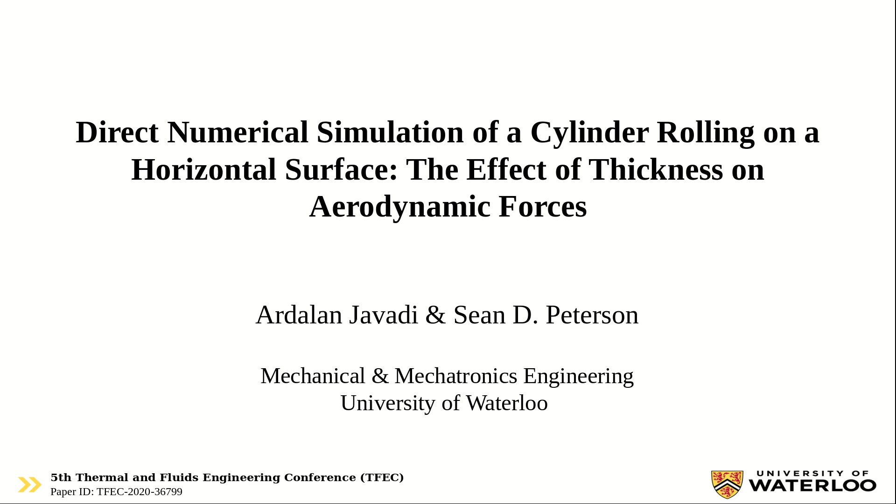Hello everybody, the presentation is about direct numerical simulation of a finite cylinder rolling on a horizontal surface, very similar to a rolling wheel on a horizontal ground. And the effect of thickness is addressed.

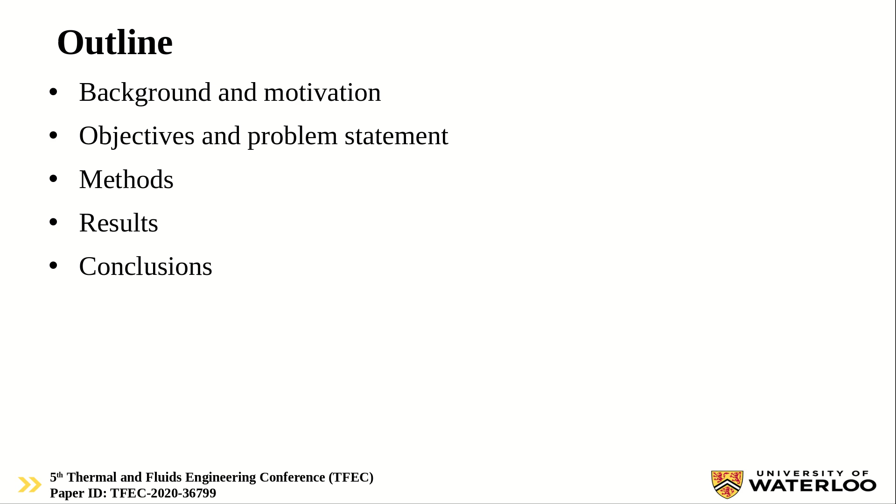We go through the background and motivation of this work, objectives, numerical method, results, and then conclusion, which is the effect of thickness on aerodynamic forces exerted on the wheels.

The background: in fact, such research is mainly funded by the automotive industry. So there is lots of research which studies aerodynamic forces on a rolling tire coming from automotive engineering, with a wheelhouse in a car or without it. So they consider forces and unsteady fluid structures.

But there is some research which considers bicycle tires in different conditions, like spoked bicycle tires, where in 2012 a job was done numerically and reported negative lift force. There are others, like cladded tires, or different configurations of bicycle tires numerically and experimentally studied, which are available in the literature.

But Pirozzoli in 2012 did a job very similar to what we've done here, DNS of a rolling cylinder, and they considered the effect of Reynolds number at values less than 1000, and they reported that the drag, as expected, decreases as Reynolds number increases, and they reported positive lift, as long as they considered just one geometry, and the aspect ratio is very similar to a Formula 1 tire.

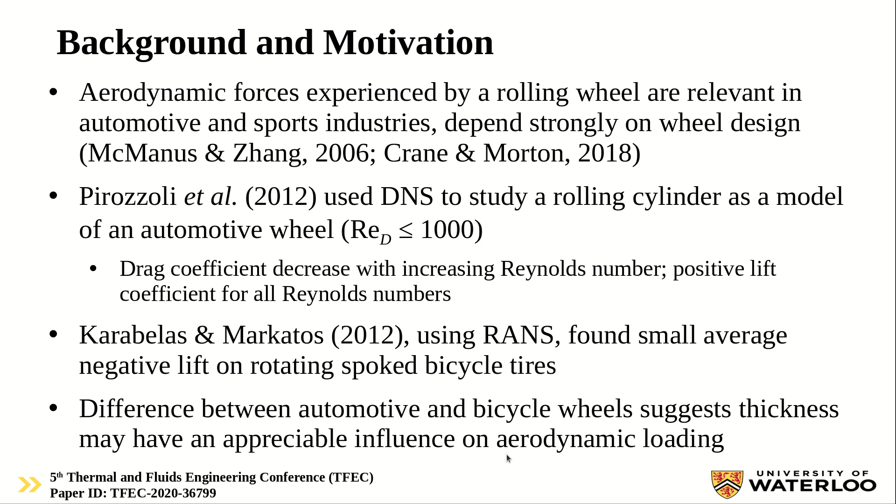So the missing chain link in this research is the effect of thickness, from a wheelchair tire or a bicycle tire to a vehicle tire, on the aerodynamic force, which is addressed in this research. So the objective is the impact of thickness on aerodynamic force. Three thicknesses are considered, from the wheelchair wheel or bicycle wheel to car wheel. The Reynolds number is constant, 30,000, based on the diameter of the wheel, which is half a meter.

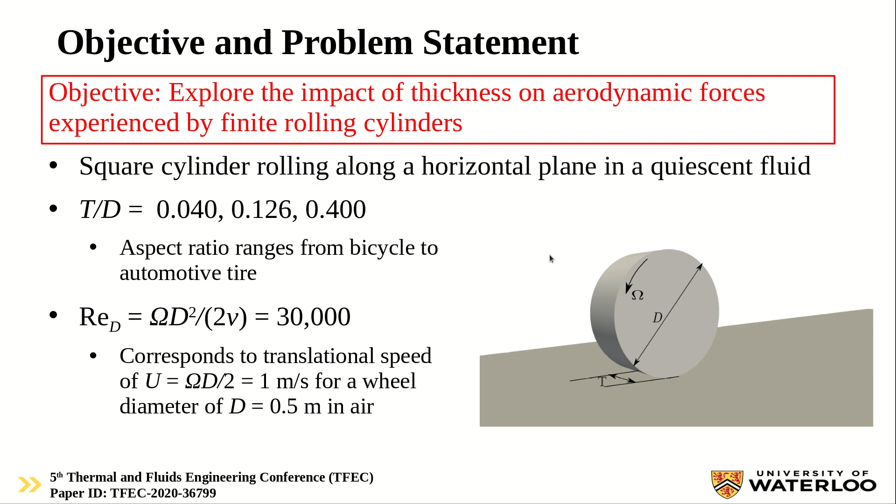The wheel is rolling, so the bottom wall is moving, and the angular velocity is 4 radians per second. From a numerical standpoint, the domain is extended 14 d in the streamwise direction. The inlet velocity is 1 meter per second constant. The bottom wall is moving. Theta starts from the contact point and rotates counterclockwise. The origin is at the center of the wheel, and the upper wall is a slip condition.

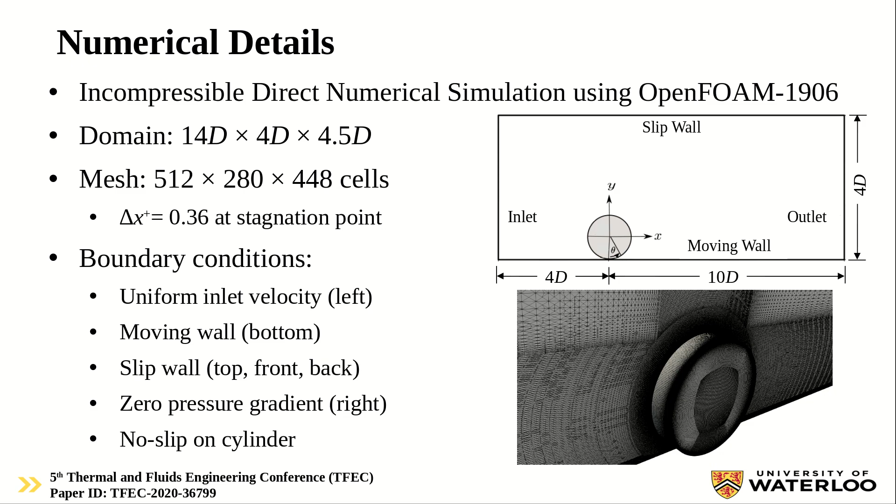Instantaneous flow field: here is spanwise vorticity from the thin case to the thickest one. As you can see, as the thickness increases, the flow gets more unsteady, and the effect of thickness on the shear layer separating from the apex of the wheel increases. The amount of coherent structures in the wake of the apex of the wheel is higher for the thinnest case, but the fluid structures are mainly generated from the sides of the wheel in the thickest case.

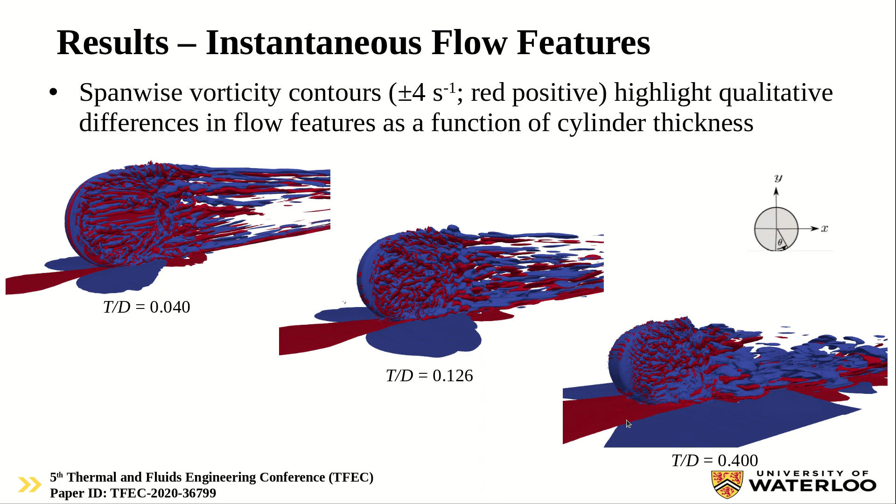Another important point is that flow upstream of the wheel feels the wheel from farther upstream as thickness increases. So this red positive region is larger in front of the thickest wheel.

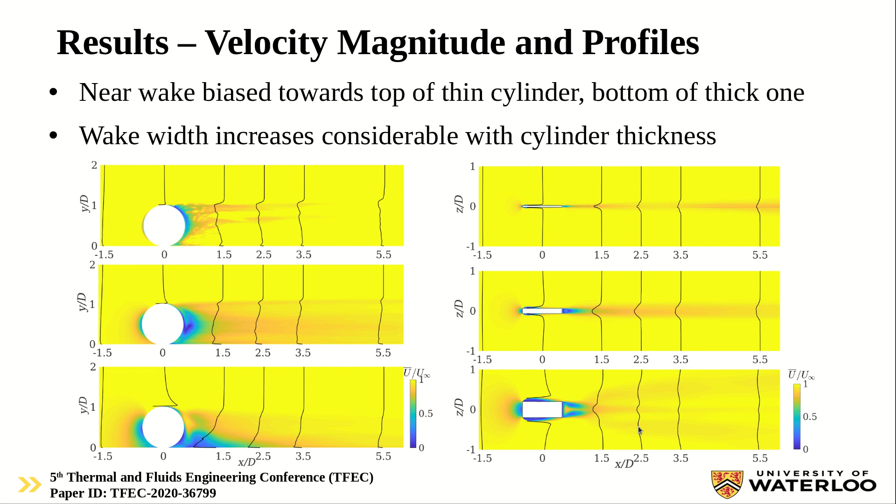Mean velocity is shown in two planes, z equals 0 and y equals 0, and these lines are streamwise mean velocity. The velocity deficit is larger in the wake of the apex of the wheel for the thinnest one, and this deficit moves downward close to the wall for the thickest one, and the width of the wake increases as the thickness of the wheel increases, as expected.

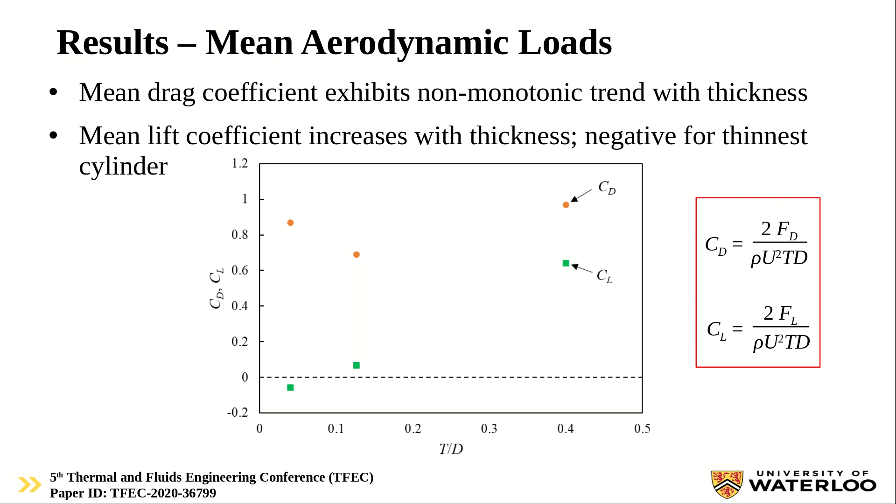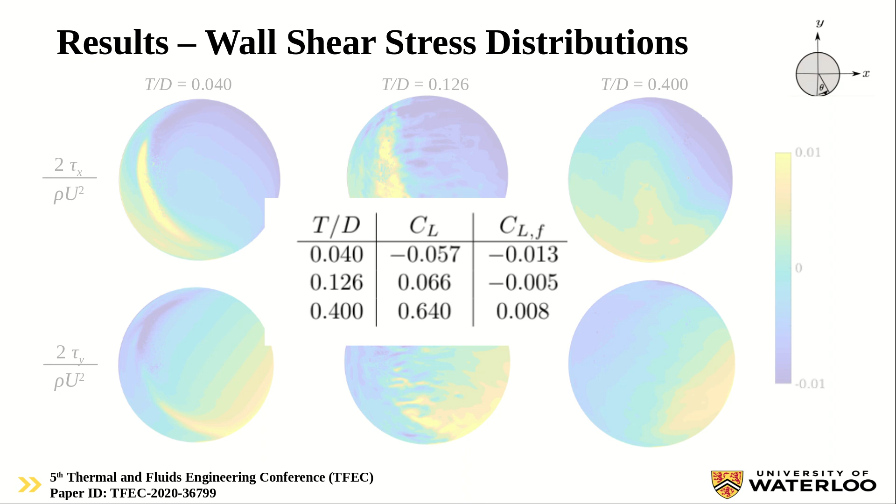Pressure distribution. Here we quantitatively show the pressure distribution on the mid-span plane over the wheel, and in the right that's over the circumferential face of different wheels. Here is the stagnation point. Ideally it should be 1, but here it is around 0.8 because of viscous forces and so on. And theta is 0 at the contact point and increases in the counterclockwise direction.

So there is a low pressure region in the immediate downstream of the contact point, and there is a high pressure region in the immediate upstream of the contact point. Both of them, the low pressure region gets more negative, and the high pressure region gets more positive as thickness increases. But another point is, the high pressure region compensates the low pressure region in the thicker cases.

So about lift force, as I said before, that's downward for the thinnest one, and it gets upward for the other two thicknesses. For pressure, this compensation between the low pressure and high pressure region doesn't happen, so pressure lift force is still downward for the thinnest one. But this compensation happens for the other two cases, and the other two pressure lift forces are upward. But the point is, this increase is drastic, and it changes a lot.

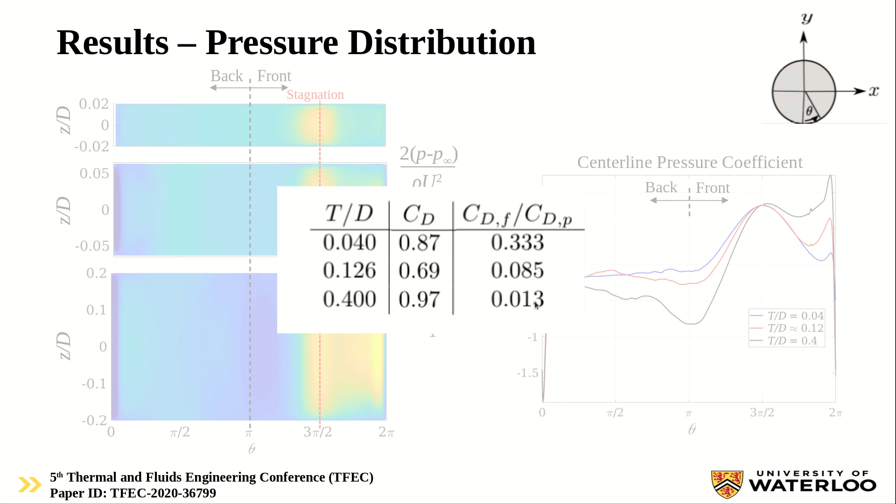For drag force, in fact, the change is about 30%, and that's non-monotonic. The ratio of friction to pressure changes drastically, and only 1% of force for the thickest one comes from viscous force, and 99% of force is due to pressure force, pressure drag force.

So in summary or conclusion, I would say that the thickness has a tremendous effect on aerodynamic forces, both lift and drag. For the considered Reynolds number, the drag force changes about 30%, and the contribution of friction force, wall shear stress, viscous force is decreasing because the flow is less attached, and the recirculation bubble on the side of the wheel is getting larger as thickness increases.

The lift force is interesting. That's downward for the thinnest one, but its direction switches and gets upward for the two thicker cases. And actually the value of the friction and pressure increases as thickness increases. Thank you very much for your attention.